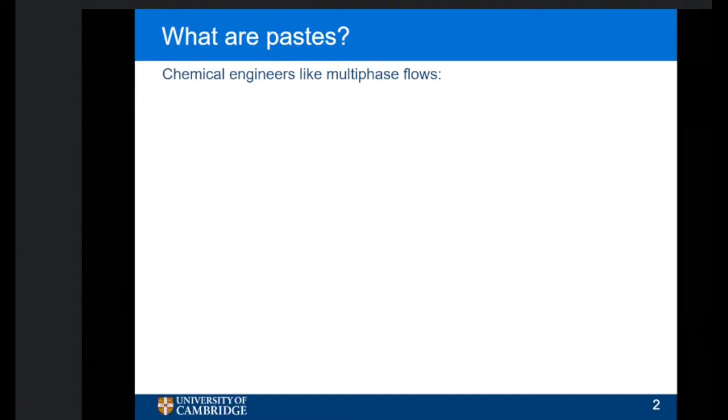Oh, there we go. So, like you, I'm a chemical engineer, and hopefully you're into the idea that chemical engineers like multi-phase flows. So what sort of multi-phase flows do chemical engineers often deal with? Well, they often deal with gas and liquid. And if you got your gas distributed in your liquid, you have a bubbly liquid. Or you have a cake batter, which is why I go to Argentina to work with people on cake.

Okay, add a bit more, add a bit more gas. What do you get? Well, you get a foam. And if you have quite a bit of air or gas, you'll have a wet foam, even more gas, and you'll have a dry foam. Okay, so that's gas and liquid systems.

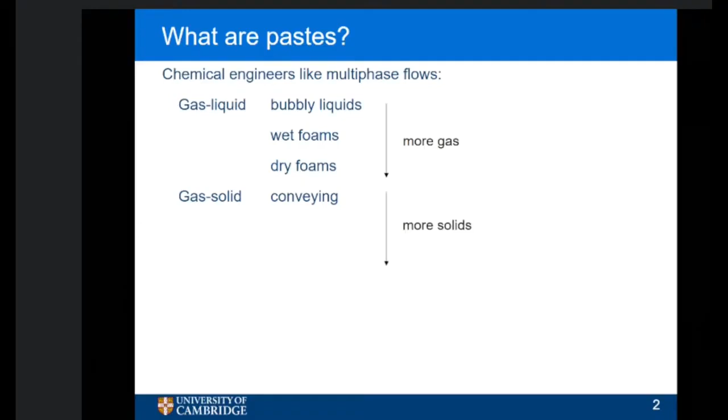Another one you'll obviously be familiar with, hopefully, is gas-solid systems. So when you don't have very many particles, you're talking about conveying, pneumatic conveying. Add more solids, you get into fluidization. And even more solids, you'll get into avalanches and things like that, very dense particle motion. Another category, which chemical engineers work a lot in, is liquid-liquid dispersed systems. And of course, those are emulsions.

So the last category to come along is liquid solids, okay? And these are suspensions. So typically you're talking about particles, which of course we always describe as being round. But those of us who work with particles know that very rarely are they ever round. Okay, and they are dispersed in a continuous phase, which is often a liquid or something which we'll treat as a liquid. Add a bit more solid, you get a dense suspension. And these can become slurries, okay?

And they're notoriously non-Newtonian. Add even more solids, and you get to the thing which we're going to call pastes. So pastes are highly dense suspensions. If you add even more solids, you end up with a soil. Okay, and to find out more about soil, you go and find a civil engineer and ask them about soil mechanics. So what we're doing is talking about something at the boundary of chemical engineering and civil engineering, which is very, very dense suspensions. Okay, and in the UK, these are often described as pastes.

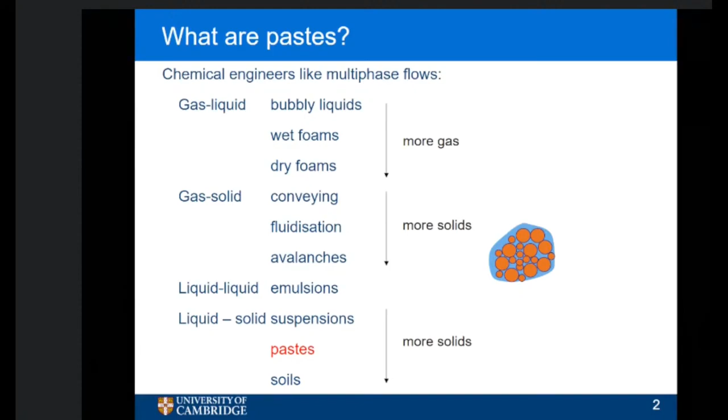The reason why we're working on paste is because actually there are a lot of pastes around. So Savio has also noticed that I might talk about foods a lot. So here's an example of materials which are made by forming, okay? And these are examples of things from breakfast cereal to pasta, okay?

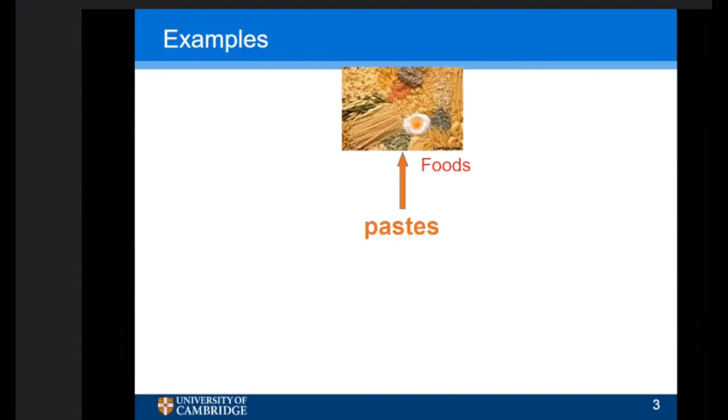At this point, I have to say that pasta is not a paste in the context that I would use. That's because pasta, based on durum wheat, is often viscoelastic. And the materials I'm going to talk about are not viscoelastic, they're viscoplastic. And unfortunately, in some languages, the word paste translates as pasta, which means you get confused. So I had an Italian PhD student a few years ago who could only really talk about his work in English, because as soon as he started talking in Italian, everybody got very confused. So that's the food bit out of the way.

Other ones are in the manufacture of agrochemicals, okay, particularly for making dispersions for spreading on crops.

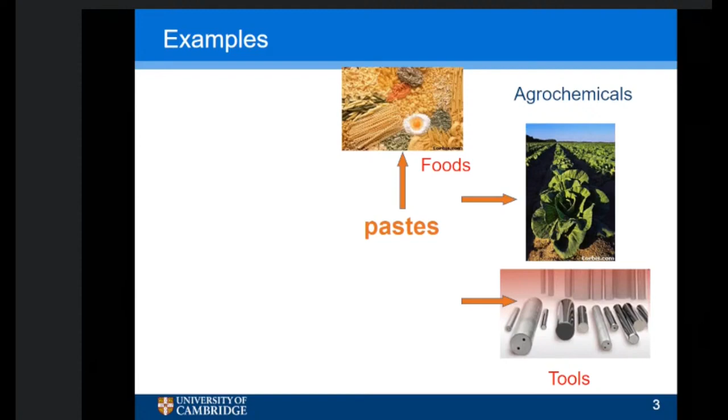We'll see a bit about how they're actually used to manufacture machine tools. Here you can see these lumps of metal with holes in them. Those are used typically for drill bits and for metal machining.

Another case is in terms of commodities, like Ariel, a detergent compound, very common here. I'm not sure if they sell it as Ariel in Brazil, but Procter & Gamble, Unilever and Henkel make a lot of their products in the form of pastes.

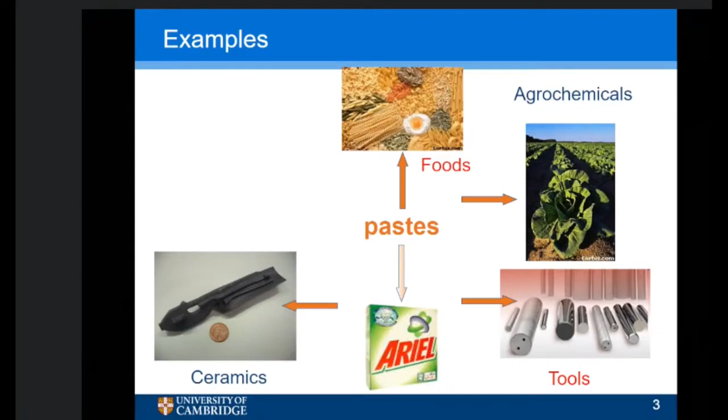Then you can use them for even more interesting things like technical ceramics. This is an example of a technical ceramic, used as the insert for a gas turbine blade. It's used to make the cavity that the cooling air goes around inside a single crystal gas turbine blade, and that also applies to aero engines as well.

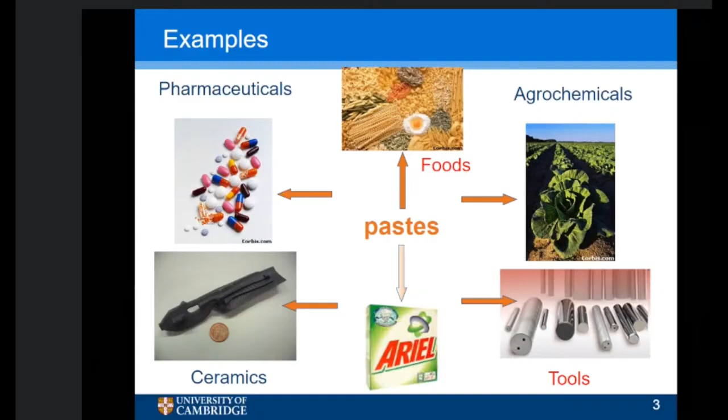The last category we've worked a lot with is pharmaceuticals, forming pharmaceuticals to make pellets, etc. So what links all these categories together is that we've worked on examples of paste in each of these industries over the last 20 years or so. There are a lot of pastes about, so that's why it's a good point to study them, because people are interested in how they behave.

I have the title of being the professor of soft solids and surfaces, and this is one of the reasons why I've got that title.

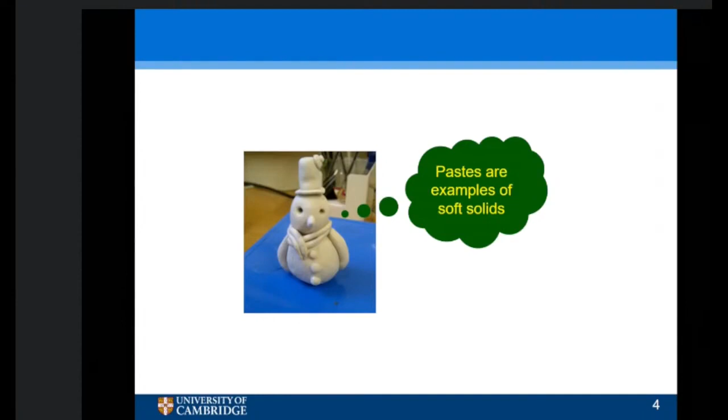In terms of engineering pastes and using paste in engineering, there are two scenarios we might be interested in. The first one I would call 'when you want it to flow.' This is where you want your material to go through a duct or whatever. The key thing you're interested in is what the material is going to do as it flows along that duct, and how much pressure you need to get it through there at a given flow rate.

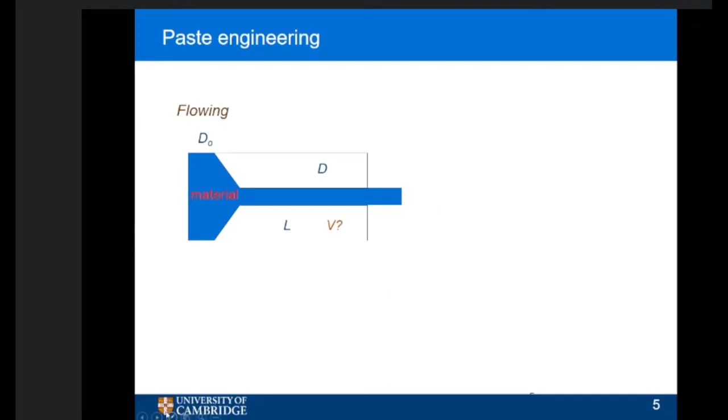Here's an example of a paste flow. Liquid chocolate is actually a very dense suspension. It's not a very stiff paste, but it fits in with the paste category. Here we have a coating system, and you're interested in how it flows over that surface.

I'm not going to talk much about flow, because from my point of view it's not that exciting. What I'm much more interested in is forming, where you take the material's ability to hold its shape to create a product with a known shape, an extrudate. Your mechanical engineering colleagues will talk about net shape forming and things like this, but it's basically extrusion.

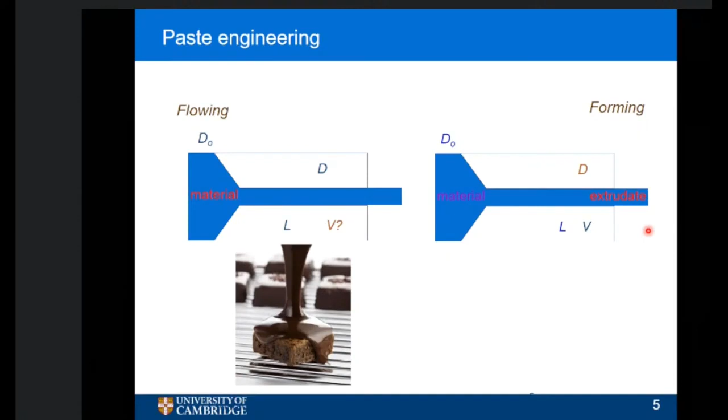If you know people who work in polymers, we use polymers because they keep their shape in these forming operations. This is an example of an extrudate, which has its own strength and holds its own shape, and you can even make it into a helical coil. By changing the shape of the die that we move the paste through, we can control the shape of the product.

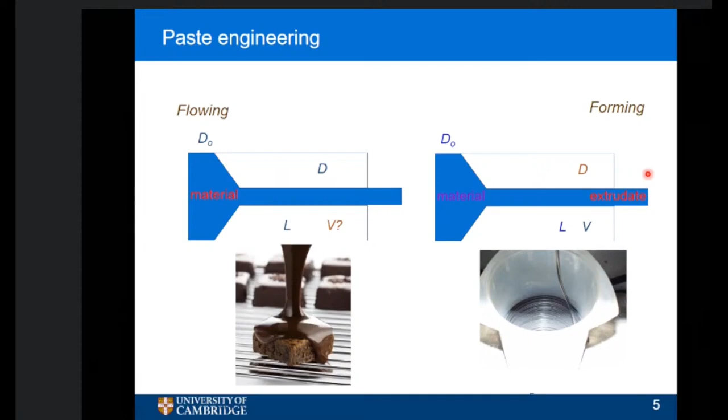If you go back to that picture of pasta, the machine tools and the technical ceramics, they're all generated by extrusion or net shape forming methods. So to do that, we have to understand how pastes behave, particularly how they flow or move going through a forming operation. I've got one equation, one slide which talks about equations, okay?

If you work with paste, this is where it starts, because we have to identify what the form of the rheology is and what that constitutive equation is. There's a lot of work in Brazil on paste-related systems and soft solids to do with waxes and waxy crude oils—if any of you have colleagues working in that area, this is where they'll get excited and start arguing about constitutive equations. So the first thing is the rheology. The second thing I've underlined here is what's going on at the wall.

Normally with a Newtonian fluid, everybody knows what it does at the wall—it does nothing, the velocity is zero. Well, we're going to find out that pastes aren't Newtonian fluids, and they do strange things at the wall. That's what makes it interesting. So we're going to find out a bit about the rheology, a bit about the wall, and then figure out how to put them together. So off we go.

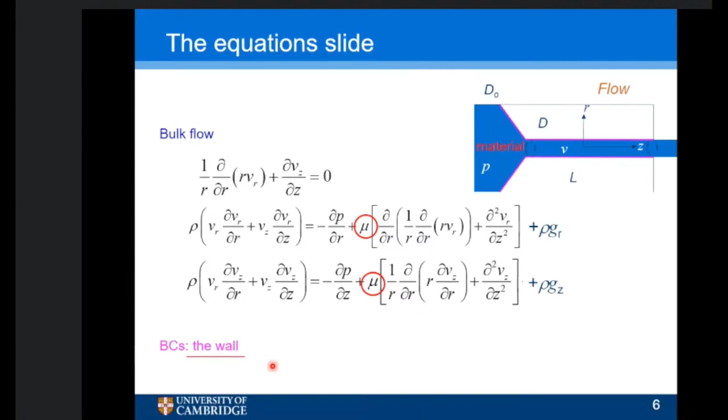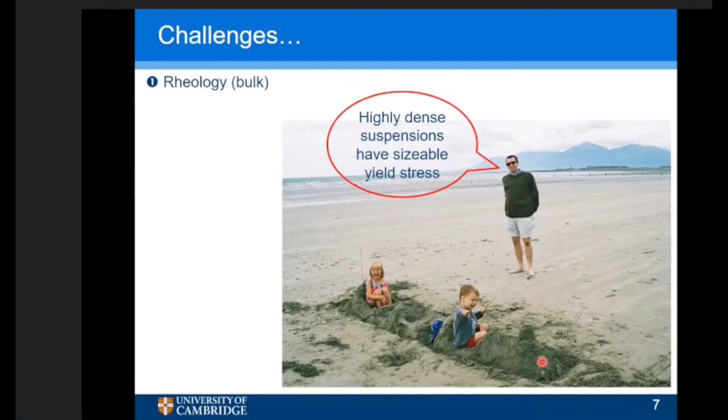So what we're talking about is a rheology of material that has a yield stress. If you don't exceed that stress, it doesn't flow. If you do exceed it, the question is how does it flow? So we have to figure out the rheology of these materials, not just in simple shear, which is what you have in pipe flow, but in extension. Because whenever we're changing the shape of something, we're usually extending it.

Measuring these things is not straightforward if they have sizable yield stresses, which means you need big forces, or if you imagine something like this sandy material, full of sharp particles—if you want to put that in your rheometer, the owner might ask you to pay for the tools first, because it will just scratch them and turn your nice smooth plates into rough plates. So there are some issues, and we'll talk about them as we go further.

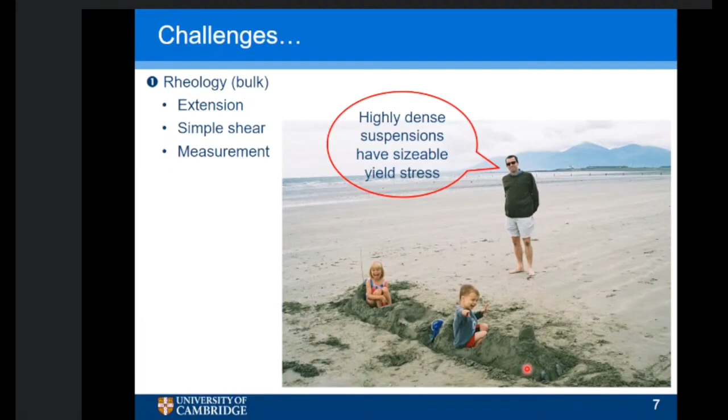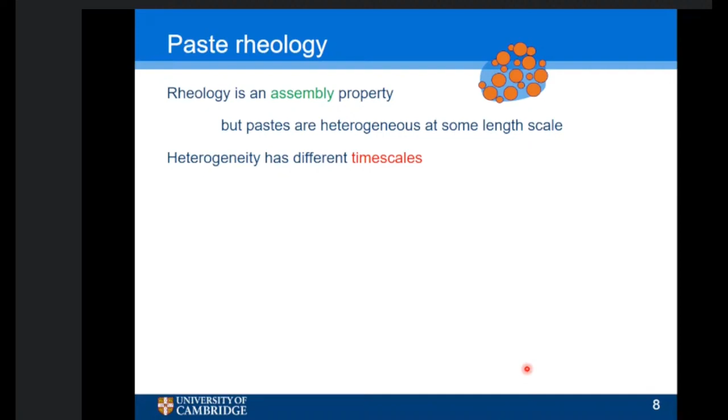So that's the rheology—what do we do for it? The challenge here is that rheology is an assembly property, a property of the assembly, all the things together. But as you see in my little sketch, pastes are actually heterogeneous at some length scale because they're particles in a binder. As a result, this heterogeneity gives rise to features with different timescales associated with them. So when we're talking about the rheology, we're somewhere between solid mechanics and fluid mechanics.

Solid mechanics is characterized by the yield stress. And if you've got any rheology friends, they'll tell you there's a big argument about whether or not there is such a thing as a yield stress—this is where the word rheology takes on quite a lot of similarity with the word theology. There's a lot of belief and assertion going on.

Anyway, moving on—we have the yield stress, which is all to do with strain, the cumulative amount of strain going on. Whereas in fluid mechanics, which chemical engineers are quite happy working with, you're talking about viscosity functions and strain rates. So whenever the material is below its yield stress, everything is characterized by strain, and whenever it's beyond that, it's strain rate.

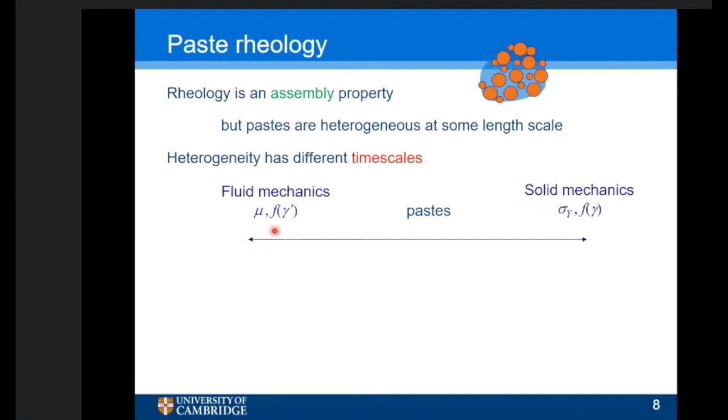But then we have to add in the time domain. In a fluid system, where effectively you have molecules surrounded by other molecules, we're talking about micro and nanoscale effects to do with relaxation of molecules, potentially diffusion. Whenever we're talking about particles—and in paste we're normally talking about much bigger than colloids, somewhere between microns and millimeters, though with sand you're much bigger than millimeters—then you have macro effects related to the movement of one phase relative to the other, the liquid moving relative to the solids, or potentially draining and thus aging. We'll talk a bit about that towards the end of the presentation. So paste rheology is not straightforward.

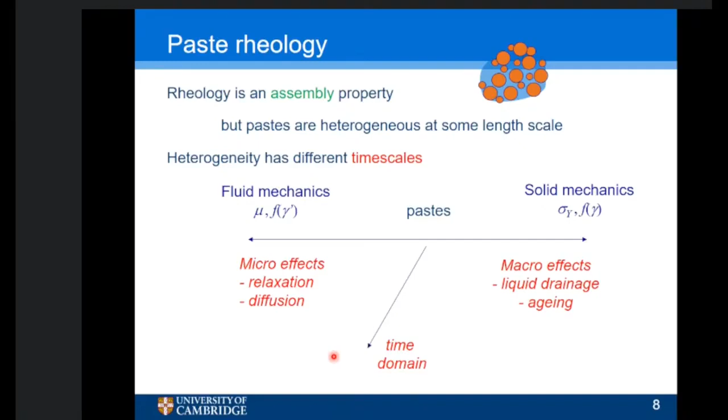That's just the rheology. Then we get around to what's happening at the wall. We have to know whether or not we have a smooth wall or a rough wall.

In this part here, you can see the streamlines are very different if we have a rough wall, because it will hold material back. If it's a smooth wall, it will all slide along the wall.

And this is the strain rate. You can see there's a large change of direction and thus strains there, which is why we have this arc of strain rates here. Along this part, we have immobile material in contact with mobile material, so we have very high strains at that junction, and in fact that can cause rupture of the paste, particularly in food systems.

So we need to know what's going on with the wall, because hopefully you can agree those flow patterns are very different. In forming, we will be changing the shape, making it move relative to the wall, and thus we need to know this in order to design a die properly, because dies can be quite expensive to build, and you need to build them as efficiently as possible.

Then the last thing we have to think about is how do you model this? I've called them bifurcating materials, where some of the stuff doesn't move and some does. If you are going to use a solid or soil mechanics model, you have to identify that, and you do that by doing calculations which identify the regions of high strain rate.

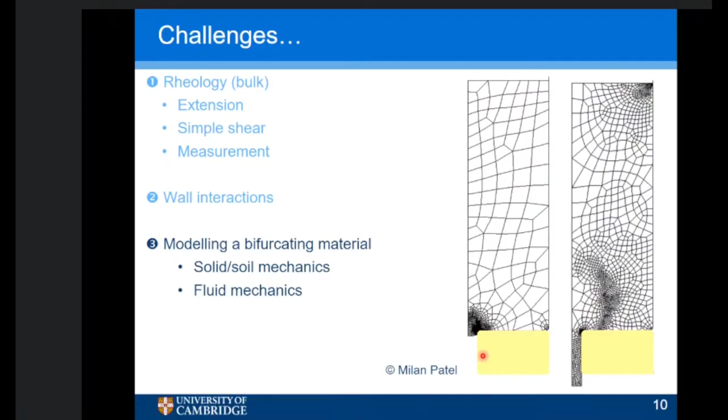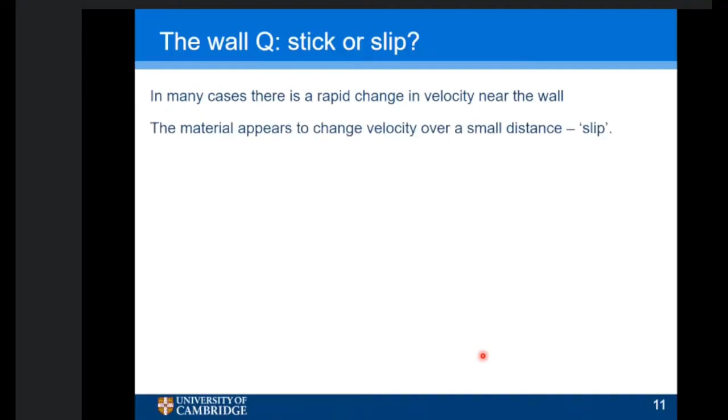So the question I want to talk about today is what goes on at the wall. Does it stick or does it slip? Because we have high shear stresses acting at the wall, often there's a rapid change in velocity near the wall, and it appears to change velocity over a very small distance, which we might call slip.

Here's a little schematic of what might be going on. In standard pipe flow with no slip, the velocity at the wall is zero, so our velocity profile looks something like this. If you've met a Bingham fluid in your fluid mechanics notes, you've probably learned about this sort of velocity profile.

In a pipe flow with positive slip, there's actually a change of the velocity at the wall, and that will be related to the shear stress acting there. So it's as if it's sliding along the wall.

Now, if we think about extruding, we actually want that to happen, because it means the amount of material that's sheared is limited to the region near the wall, and the rest moves through with constant composition. Pastes do this a lot—that's why people use them a lot, because you can extrude them into nice shapes quite reliably. But it does mean that if you're trying to model it, you have to know things about the slip functions.

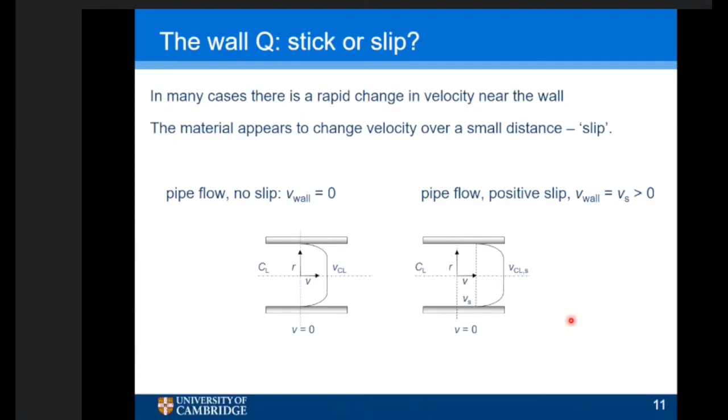So, shall we show you how we know this happens?

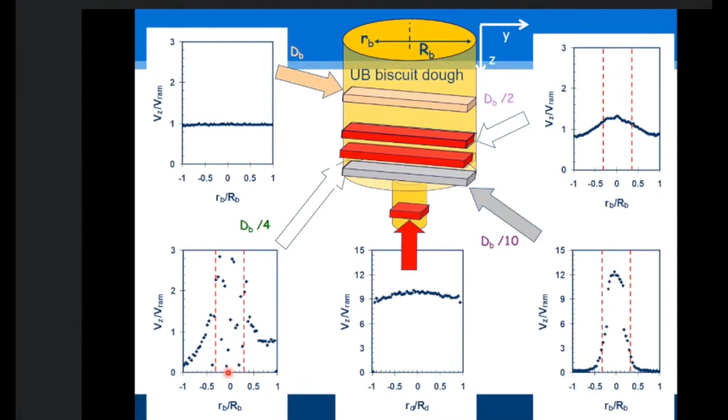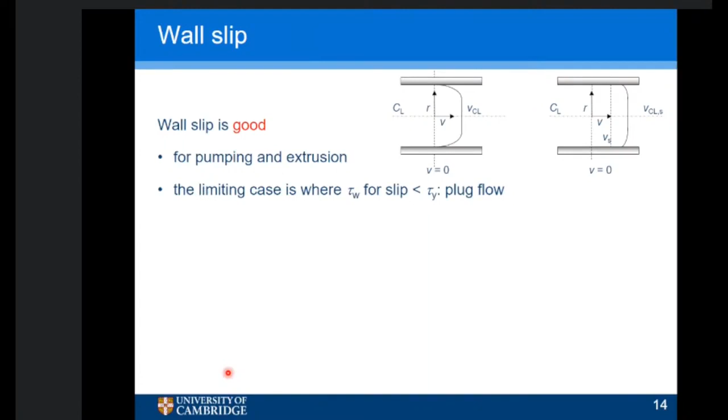Now, MRI is really nice if your material is actually compatible with an MRI system. The one thing about MRI is you don't really want any metal anywhere near it, and for some of the systems I'll show you, they won't work in MRI systems. So it is this paste - these pastes do slip, and it's good for pumping and extrusion because it means everything moves through as a plug flow. The limiting case is where your wall shear stress for your slip is less than the yield stress material, and everything just moves. Once you get it to change shape, it flows through quite nicely.

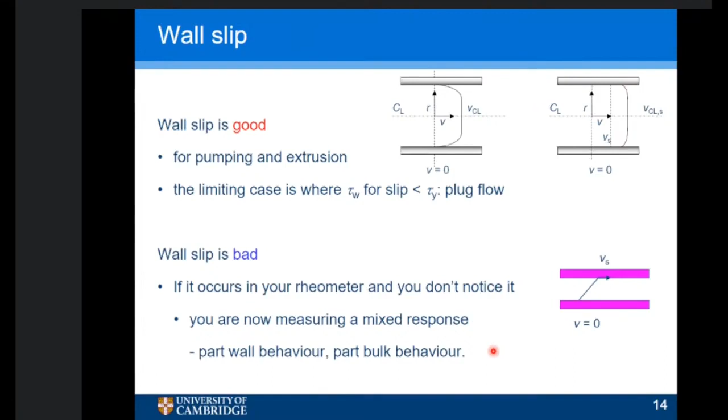It's bad in these two circumstances. First of all, if it's happening in your rheometer and you don't know about it, you'll interpret your data as being the bulk properties of the material, where actually you're measuring the slip properties. So if you're working in rheology, you'll know there are different ways you have to check that you haven't got slip in your system. You have to know how to decouple your numbers from a rheometer if you might be getting slip.

Okay, so how might we describe this? Well, if you're doing fluid mechanics work, you might describe this in terms of the Navier slip relationship, and this is the simplest relationship for slip behavior you'll find in fluid mechanics. So your relationship is between the wall shear stress and the slip velocity, and beta is the Navier slip coefficient. It will go from infinity to 0.

We normally set that to infinity in our standard Newtonian flows because there's nothing moving at the wall. If you're talking about Coulombic friction, and hopefully you're familiar with something like this from physics, you relate the wall shear stress to the normal stress acting against the wall, and then some cohesion sort of measure. This is where we get into the particulate nature of paste, because if they're very dense, they will be exerting strong normal stresses on the wall, which gives rise to the local shear stress being related to the normal stress, and thus the slip velocity.

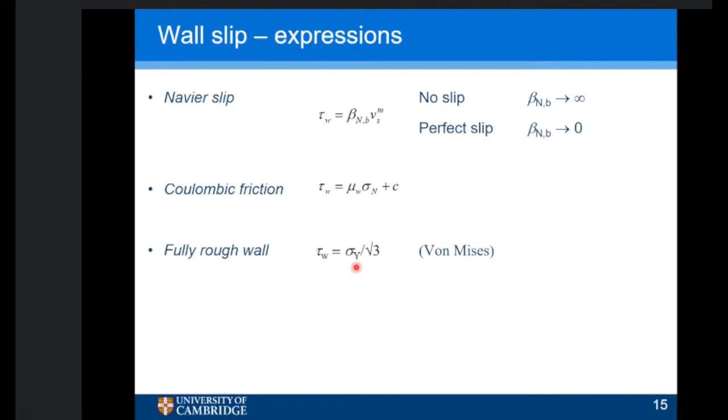So we have to know, is our slip behavior for our pastes related to the total pressure or the normal stress we're actually exerting on the wall? And if you have a fully rough wall, your wall shear stress is just related to the bulk yield stress of the material, it's just shearing internally. So this is the limit for a paste that would actually be shearing completely at the wall. There's some really nice work done over the last 10 years or so on tying these things together.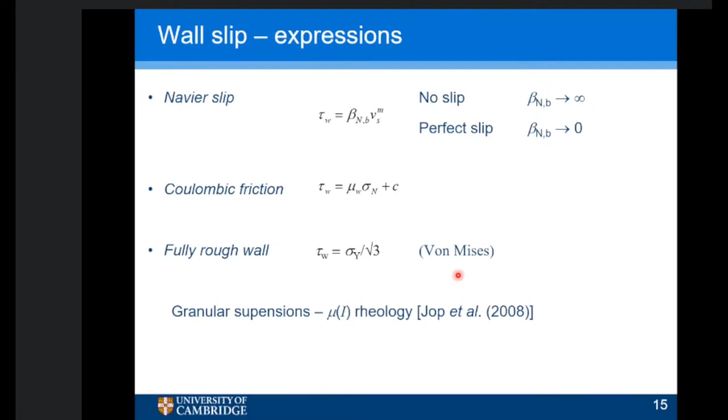So here's a story for you. We're interested in a paste that does things like this. Now this is made from tungsten carbide. Tungsten carbide is the second hardest material known to man, and it's used to make machine tools, and that's the material used to make these machine tools and drill bits, etc.

It's made in Austria and elsewhere by a company called Ceratizit. So a lot of our work in this field for the last 10 years has been supported by Ceratizit, because this is fundamental to the manufacture of a whole series of their materials. So tungsten carbide, W for tungsten, C for carbon, is quite dense, and it won't fit in an MRI machine, okay? Because it just won't. So we've had to look at other ways for doing this.

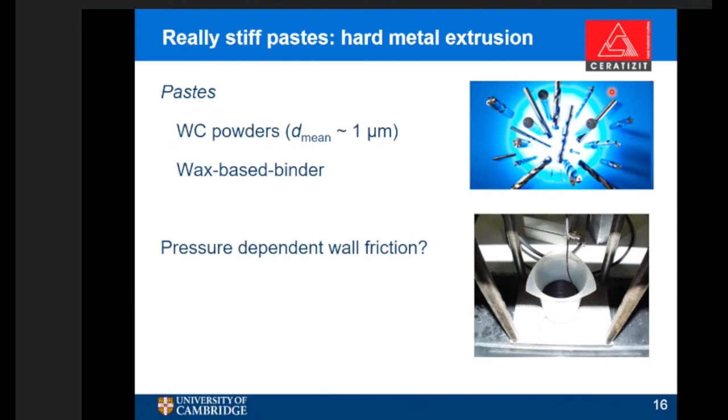Our question is pressure-dependent wall friction. Is it happening with these materials? So normally we'd say, how do we measure wall friction or wall slip? Well, the first one would be in a classic rotational rheometer. We'd use parallel plates and change the gap height, and there's some work done by Prudhomme and others that allows you to decouple that.

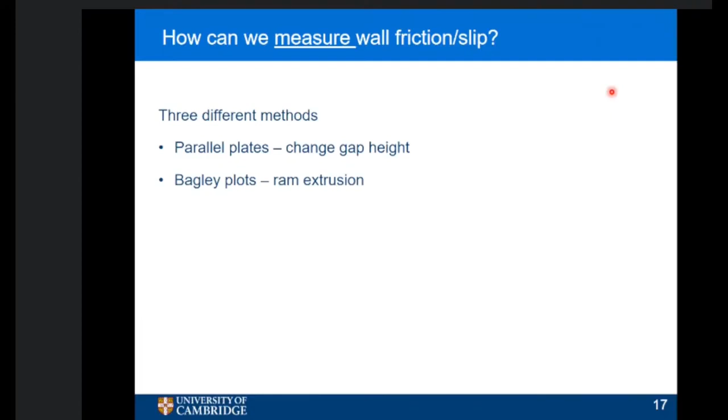This material, tungsten carbide, will basically erode your plates, okay? And it has a yield stress which is a lot higher than most rheometers will handle, so that's not really an option. Another method is to typically use ram extrusion or capillary rheometry, and you interpret the data in terms of Bagley plots, which I'll talk about in a moment. And then another method I'll talk to you about is one we developed for these systems, which we call a two-stage Bagley plot.

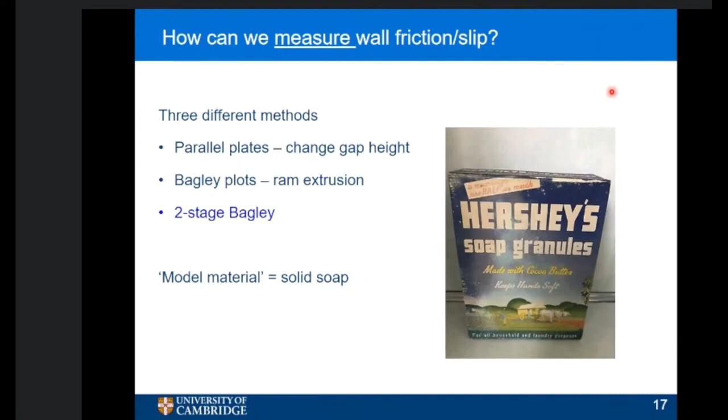And here's one of the materials we used as a model material, which is simply soap granules, solid soap granules, which are actually quite soft. Whenever you compress them enough, they will flow together, okay? And the other good thing about solid soap is it's a very low paperwork material, you don't really have to worry about the health risks of soap granules. And it's very easy to clean. So that's another thing.

So now what I'm going to do is introduce you to the Bagley approach and introduce this book: Paste Flow and Extrusion by John Benbow and John Bridgwater. John Bridgwater was the Shell Professor of Chemical Engineering in the department here when I joined. He was my first boss, and he got me involved in pastes.

What John Benbow and John Bridgwater did in looking at paste was say, let's take a very simple approach, treat it like a simple engineering plastic. So we'll extrude something by ram extrusion, and measure the extrusion pressure Pex from a barrel diameter D0, a die diameter D, of length L, at a given velocity. We relate the extrusion pressure to a term dominated by die entry - the extensional flow in the die entry - related to the change in area, the log D0 over D, and something to do with the paste yield strength. That's what these terms here are.

Then along the die, we have a flow with a wall shear stress, related to L over D. So you fix this bit by keeping D0 over D constant, and change L over D. Then you plot your extrusion pressure against L over D, and the gradient gives you the wall shear stress. That is effectively a Bagley plot. You'll find it written slightly differently in the polymer literature, but that's what you do - you change the length of the die, find the change in pressure, and that gives you your wall shear stress. It does require a few experiments though.

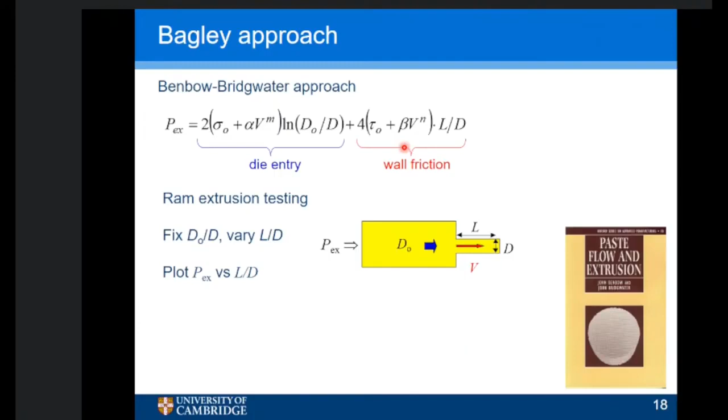This is the sort of result you get from these wax binder tungsten carbide pastes. These are stresses in the order of megapascals - remember 1 megapascal is 10 bar, so that is not a soft material. The yield stress, the sigma y term, in terms of these velocities, goes from about half to well over 1 megapascal, so this stuff is pretty stiff. Your standard rheometers won't shift it - that's another reason why we have to use ram extrusion to characterize it.

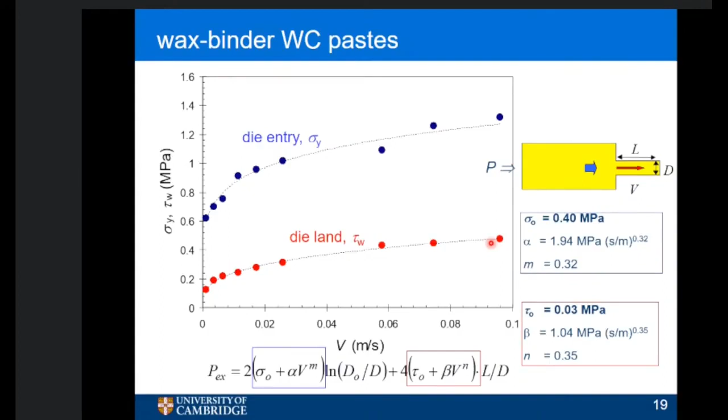The other plot we got here in red is the die-land behavior, which gives us the wall shear stress - we're talking about 0.1 to 0.4 megapascals, so that's quite a lot of work to make it move along a die-land. This gives us a way of characterizing the materials. If we change the formulation, we can find out what these numbers are, and then put these numbers into simulations, whether it's a solid mechanics or soil mechanics sort of code, in order to model and find out the pressures.

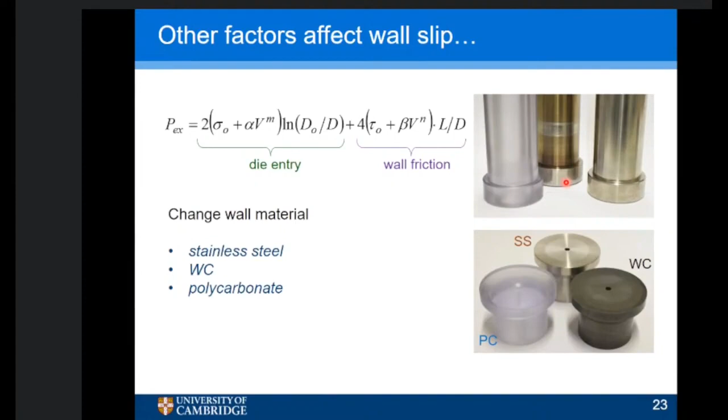So actually what we have is 3 sets of identical apparatus. This one is made out of polycarbonate, this one is made out of stainless steel, and this one is made out of tungsten carbide. So what we're going to do is show you the results for extrusion of a given material through these 3 things, identical tests, and what happens to the wall shear stress and slip behavior.

Hopefully what you can see is there's definitely an effect of the interaction of the solids, in this case the soap, with the wall. The reason for that we could cover in questions if you want, but there are a whole series of things related to the chemistry of what's going on at the wall, but also the rate of heat transfer as well.

Because if you're getting a lot of slip at a wall, that means you're getting a lot of dissipation. The question is, what's the temperature of the material at the wall as a result of it being sheared, because it will do that work against itself. The polycarbonate is actually a very good insulator, so all the heat stays in the material. Whereas the stainless steel and the carbide are much better conductors, so they will take the heat away.

You don't need a big change in temperature to change the rheology of something like soap. I might have answered that question already.

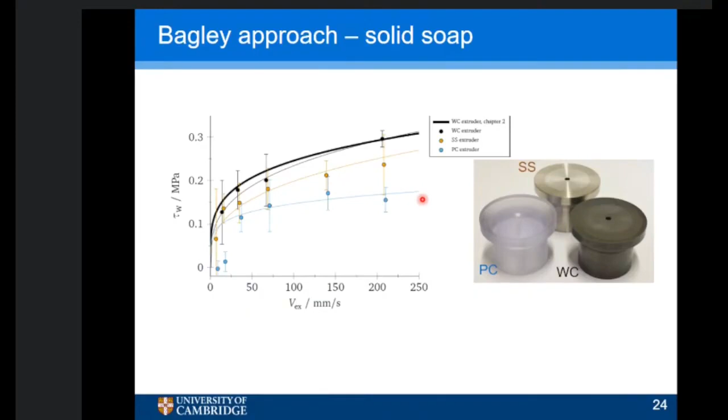So let's get on to the last bit. We've done all these measurements. How do we then simulate or calculate what will go on in a forming operation? The first thing we would do is use computational fluid mechanics, so we set up the Navier-Stokes equations and solve them. We have to come up with our constitutive relationship, and a very common one in the world of viscoplastic fluids is a Herschel-Bulkley fluid.

It's got a bifurcation: below some criterion for yield stress or critical stress, your strain rate is zero. Above that, for the deviatoric shear stress, you have a relationship which gives you the relationship between the stress and the local strain rate. Usually this is done in a Eulerian way, and you capture the strain rate.

Here we have two of the results that Matt Bryan did in his thesis, for a square entry die. The dashed line is the plane of symmetry, the axis of symmetry. This is a cylinder for different Bingham numbers, same fluid, different Bingham numbers. The Bingham number is a relationship between the yield stress and the viscous stress. A Bingham number of 1 says your viscous stress and yield stresses are comparable.

These are streamlines, and it's telling you that the slow regions are just in this little corner, for a slip coefficient of 10 to the 0 - this is a Navier slip coefficient. These things all change if you change the value of beta. The solid line here is the shape that the material, in this case a microcrystalline cellulose material, took. It basically hangs out in the corner. Everything else is sheared, it's all moving with max streamlines.

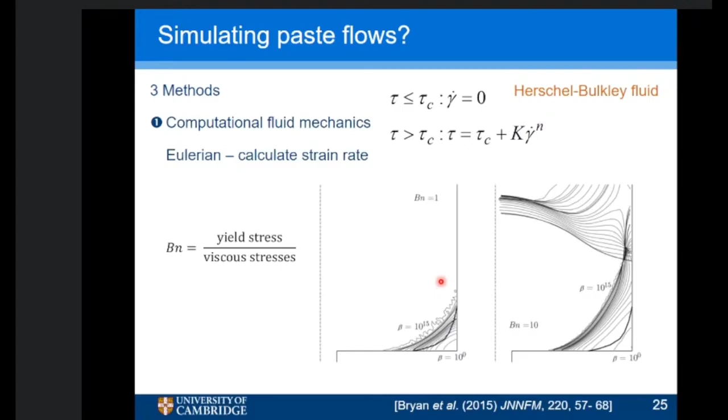So we move on to one of the other methods, which is to use solid mechanics approaches. This is what Harry Ayton, who just finished his PhD, was working on. He was getting these pressure-dependent wall slip functions to go along there, and there you might work with a thing such as a Cowper-Symonds material, which relates the local plastic strain rate.

That's what E dot super bar sub PL means, and there's your von Mises stress. So you need to work out your von Mises stress, the deviatoric stress in the material. Sigma naught is your characteristic yield stress, and DC and ZC are the parameters to describe a Cowper-Symonds material.

Now you can rearrange that equation so it looks like a Herschel-Bulkley fluid, but the key thing is it's working in terms of plastic strain rather than simple strain. You do this in a Lagrangian method and calculate the strains, but you have to keep updating them, which gives rise to adaptive remeshing codes. The mesh evolves over time depending on whether you have a smooth wall or a rough wall. The world of adaptive remeshing has come on a lot since Dan Horban did his PhD back in 1999.

This is all fully programmed in a whole series of codes, and there are some really good codes that can do this, such as Forge 3D and things like that from groups in France and other places. We're not a numerics group, so we're not the people to ask about how you'd do this, but there are some really, really powerful codes out there.

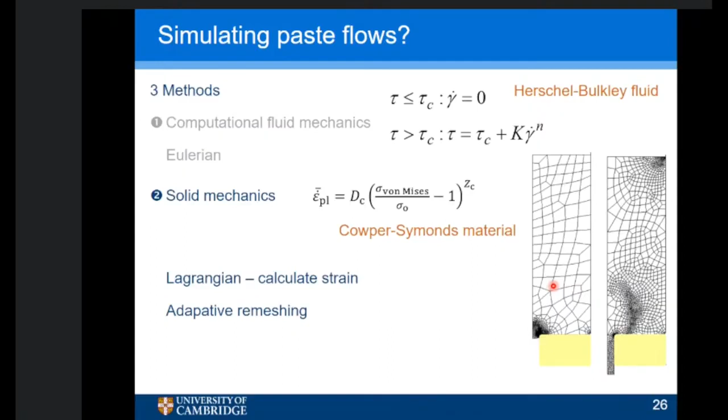But the last approach I'm going to talk about is something we have done which is a bit special, which is about streamlines. Sorry, just to go back to this.

Here are the streamlines you calculate from one of these methods, and this is your von Mises stress. You can see here that all the material in this conical entry die is now in a state of shear. This is not a fully rough wall, so this angle is such that you don't get material captured in the corners, which is good, because if material stays in the corners, usually it does things because it's been hanging around for a while.

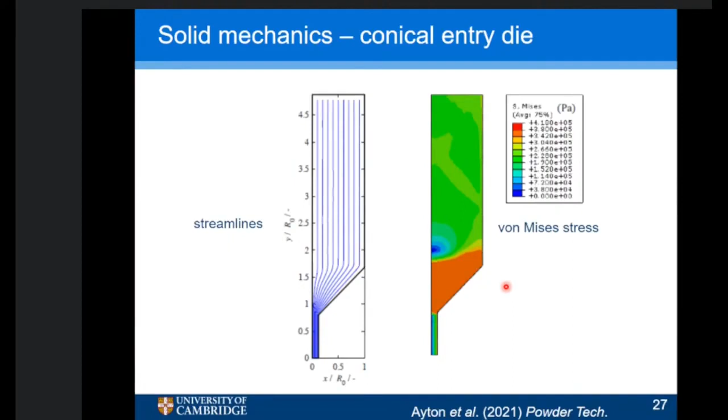So getting back to the last approach, which is actually getting back to the nature of a paste, which is treating it as a soil. The reason for this is that we've spent quite a lot of time working on when pastes don't behave very well, and in order to do that, we have to understand how the liquid phase and the solid phase move relative to each other.

Just to remind you, or inform you if you've never done soil mechanics, what you do is split your total stress, sigma, into a solid stress, which is the stress acting on the solids, a three-dimensional deviatoric stress, and the pore pressure, which is the pressure taken by the liquid, a simple pressure. What you have to do is link the two together.

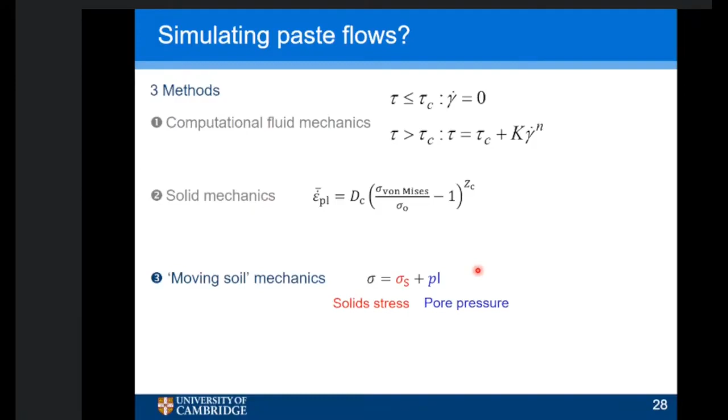And if it moves, it means your material is going to change composition while you're extruding it, and that's not good. So here you have the result of this. So here we have... trying to find my cursor, yep. Oh, there it is. Hello. There we go. Right.

So this is the ram displacement in an extrusion, and this is the total pressure that we're measuring. If we go at 5.8 millimeters per second, we can see that it raises up the pressure. Then over time, the pressure gets bigger and bigger and bigger, and if we kept on going, you'd get bigger and bigger still. Whereas if we go ten times faster at 58 millimeters per second, it reaches an extrusion pressure and then carries on like normal.

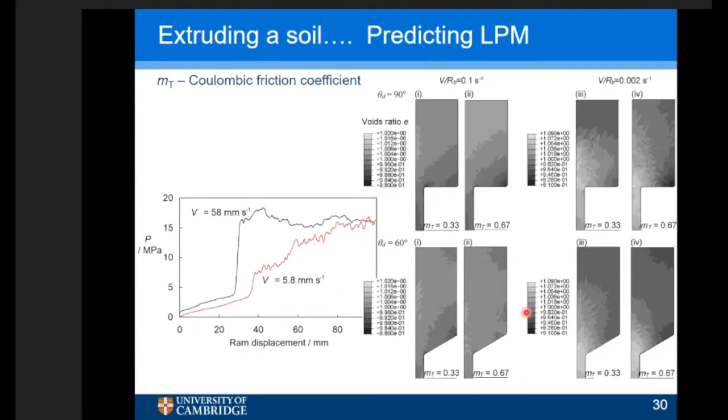So we come to the end of the talk. Closing remarks: hopefully you've realized that pastes are all around us. They're in widespread use, just not often called pastes. In terms of engineering, paste engineering or practice leads paste science. The book by Benbow and Bridgwater was published in 1993. There isn't really a paste science book yet, and I'll explain some of the reasons for that.

One reason is that they're complicated systems - multi-phase because we have solids and liquids, and those liquids can be complicated in their own right. They're multi-scale, associated not only with the geometry of the system but also the particles. A lot of people mix particles in making paste, they just don't use the same size. The complexities come from different sizes of particles, different types of particles, the rheology of the binder isn't necessarily Newtonian, and we've got wall interactions. So in many ways it's a good engineering topic because we can't say one simple theory will answer everything - we have to develop ways of treating the materials and identifying the most appropriate models for describing how they behave.

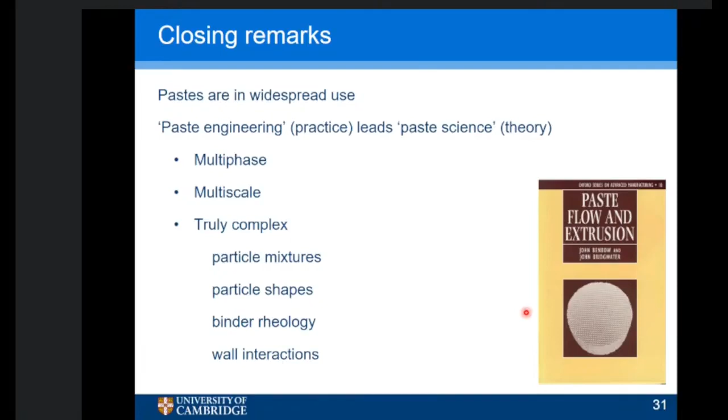So in closing, I need to say thank you to a few people. The people at the bottom who have supported us through this, especially Ceratizit, as I've said for the last few years. This is Harry, who's just graduated. This is one of the reasons we like working with Ceratizit, because they work in this part of Austria, so every so often we have to go there for a visit with the sponsors. This is Matt, whose work I've shown, and Michael, Harry's co-supervisor. Sarah and I have worked a lot on liquid phase migration.

This is John Bridgwater, who was the person who gave me the job. Millen and Stuart Blackburn are the people who worked on the soil modelling. Mike Johns and Eloise worked on the MRI group. And this is Roland and Brendan and Harold, who are the first people who worked with Ceratizit.

So the last thing to say is this. Now, I'm not very good in Portuguese.

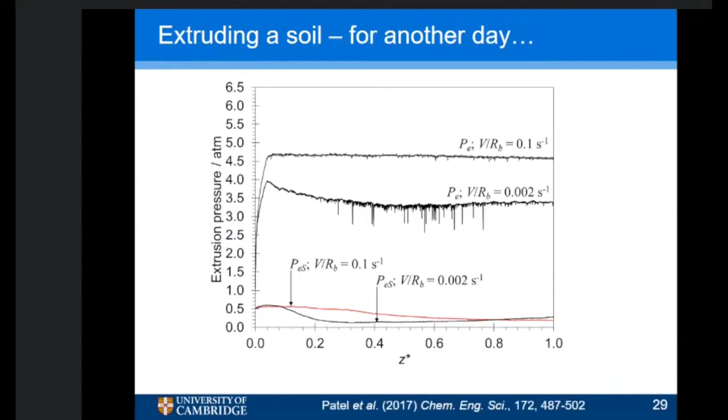There's another question here which calls for slide number 20: instead of two diameter reductions, do you think a constant reduction of diameter in a conical shape would result in a lower shear stress on the walls? So that's the question. Yeah, I mean, you could do this with a conical diameter.

Obviously it can't be too sharp, because then you're looking at an extensional system. One of the things we have here is that we're quite happy with it being in a 1D sort of system. People have used conical systems as well, because then you're capturing an evolution of velocity too. So as long as the system isn't very pressure dependent—because the plot I showed you here showed a nice linear gradient.

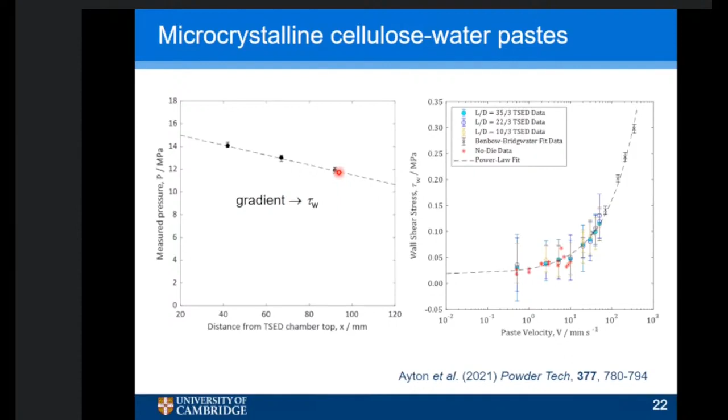Ian, if you go back to slide 20, please. One of the things that came to my mind when looking at this device is how did you guys come up with the distance between the pressure transducers? Do you have to play around a bit until you get it right, or how did you come up with that spacing? At the end of the day, I'm wondering whether if you change the material you're trying to measure the stress for, that distance would play a role, or if it works for any material.

That's a good question, and I don't know the ultimate answer. One reason is it's a couple of die diameters apart—just a geometrical relationship. So if there's anything related to length scales in that flow, we would account for that. The other point is, of course, how close can you get them in terms of machining the things, because these pressure transducers aren't that small, so you do have a confinement issue. This is one reason why in the latest version they're located at different positions around the cylinder, so they don't interfere with each other.

But the other thing you could do here, of course, is change the nature of the wall. You can put a liner in there, and as long as you match the liner up with the pressure transducer, you can look at different materials as well.

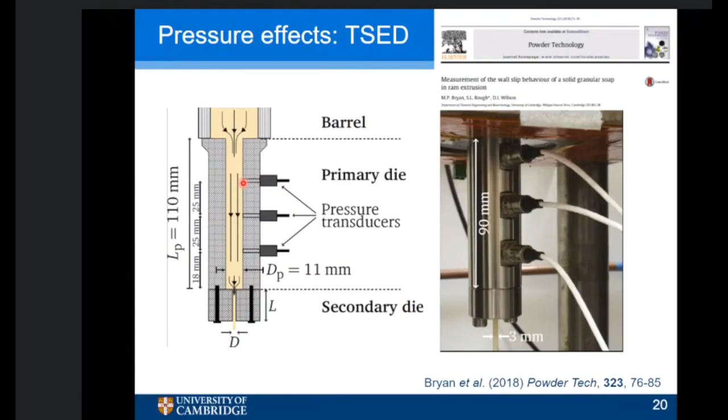Effectively, it was creating its own sausage skin. You had the material added on the perimeter there, creating a film which then held the material together. The product was then cooked, so you couldn't tell this had happened in the extruder. But whenever we sectioned the extrudates, you could see this lovely material just holding it all together. So yes, if the rate of dissipation is high enough, particularly with wax-based binders, which is what we were working with Sarah a while ago for the tungsten carbide systems, they're very temperature sensitive.

So we had to do quite a lot of work trying to control or characterize the temperatures in that work. We have probably one final question, which is: is there any wall coating that could be used to lower the shear stress on the walls?

Wall coatings, there probably are. The thing is, what you're trying to do is design a wall coating that repels particles. And the particles, of course, are forced against the wall because of geometric relationships. So it's not the same as a polymer affecting friction in a flow. These systems are very dense, so the particles will be pushed against the wall. There, the issue is, can you get something that promotes sliding of the particle along the wall, and also that the coating is hard enough not to be abraded by the particles.